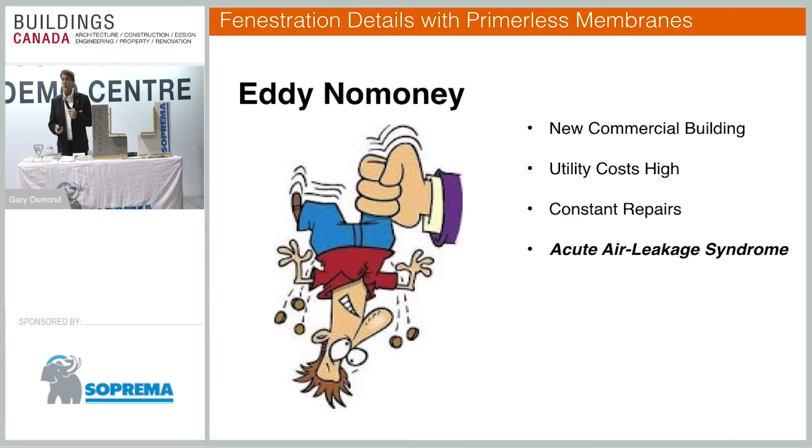The real question becomes - how does this happen?

Look around you. This entire venue is about air barrier technology. We all know the issues - if air can pass through the wall, it's going to create some type of problem one way or the other.

So we clearly know that we have to make critical connections wall to wall, wall to roof, and wall to foundation. But the new frontier is really taking a look at those other critical penetrations as opposed to connections, dealing with window openings, door openings, and different types of penetrations of the exterior facade, be it mechanical or electrical.

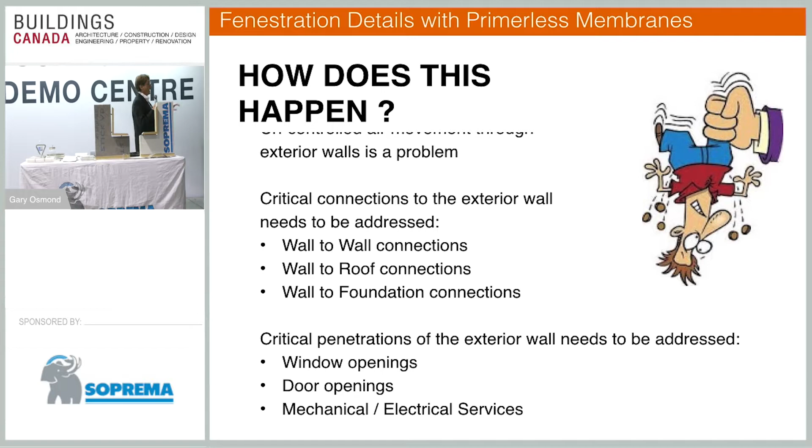The reason this becomes such a critical realm of construction at this point in time is because for the most part, your air barrier contractor is going to be looking after all this. But once we get into these types of details, it's a whole new set of trades coming on, and it's helping and working with these people to understand the consequences and the conflicts of not doing this correctly.

So this is really where I'm going to be focusing a lot of this conversation.

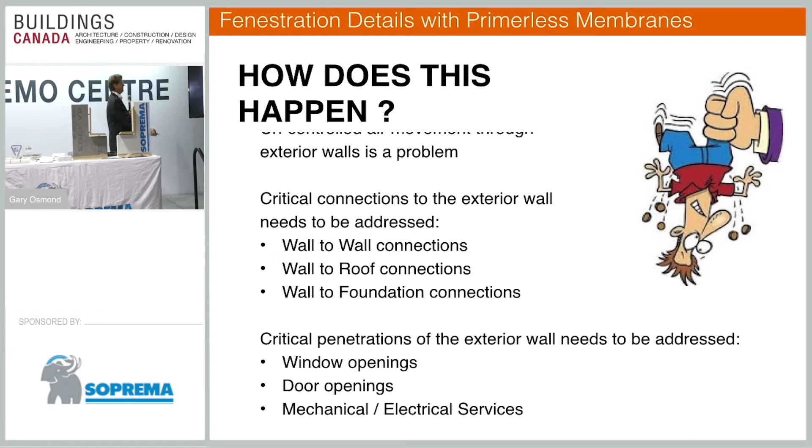You need to be aware there's new standards in the building code. Everybody get to read a building code these days? Somebody put their hands up.

It's more than good practice now. We've been pushing and preaching this sort of terminology and technology for a long time as a good idea, and we have to do it. But it's more than good practice - it's in the building code. You'll find it in Part 5, you'll find it in Part 9, with the National Building Code, the Ontario Building Code, and of course the National Energy Code.

There are sections that specifically look after heat, air, vapor, and precipitation - that's how the code addresses it. And the issue now being said in the code that wasn't said before is it's a matter of design and construction. So that puts you guys a little bit more on the responsibility side when it comes to what is being designed - we have to ensure that it's being properly constructed.

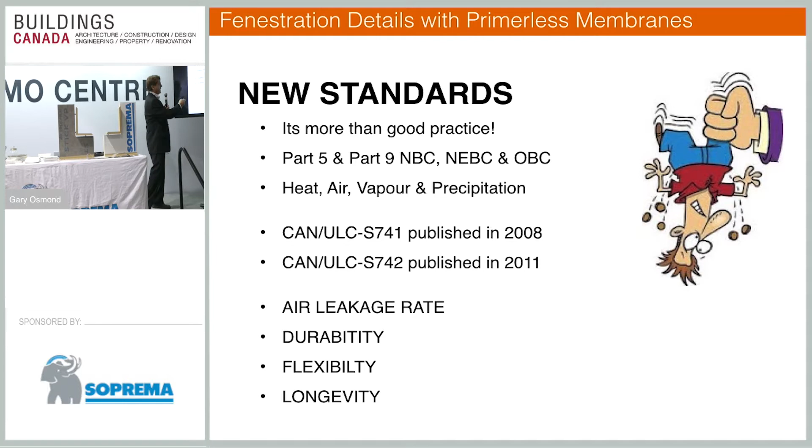There are two standards that you have to be aware of that is in today's code: CAN ULC S741, published in 2008, and CAN ULC S742, published in 2011. They are in the 2012 building code that was released January of 2014. These go beyond some of the other requirements.

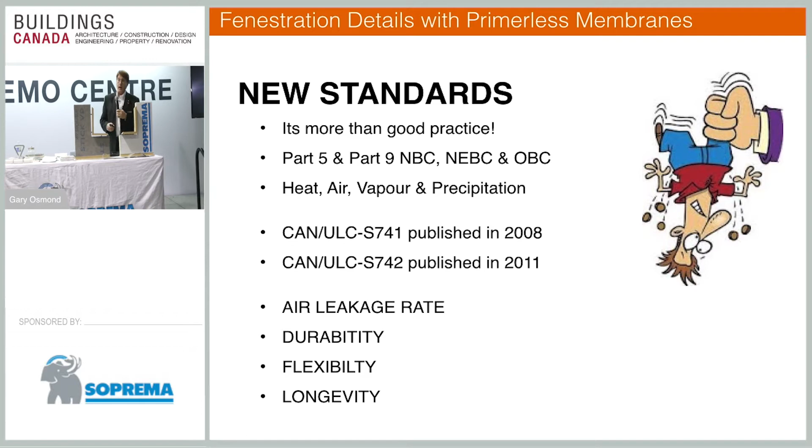Now, unlike a lot of other types of elements within the building, they can't easily be replaced. SOPREMA is synonymous with roofing membrane systems.

Even at that, we expect that in about 35 years you're going to have to do a roof repair, and it's not uncalled for. It's clearly understood. But when we deal with something that's inside the walls, the expectation is going to be there forever, and you're hoping not to go back. Where re-roofing is re-roofing, if you're coming into the wall, it's called restoration, and it has a huge capital projects number attached to it. So looking at those three values, durability, flexibility, and longevity, you need to pick membranes that you're going to be comfortable with, that are going to be there and perform for a very, very long time.

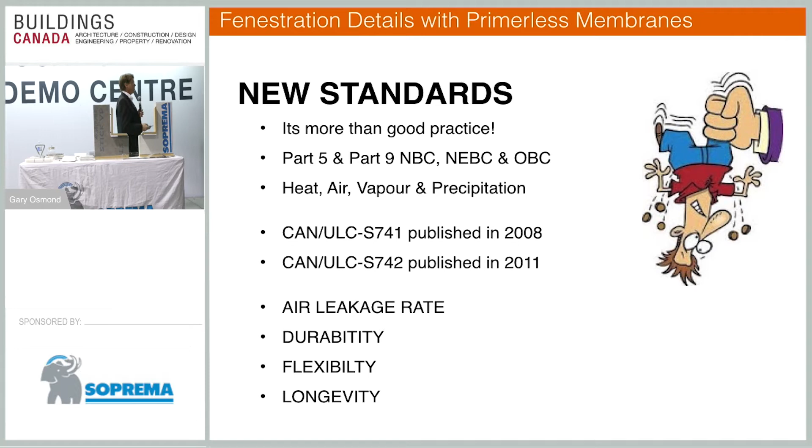So this is where we are now today, taking a look at wall openings. My first comment as we look at this issue of how do we treat the details is to really understand what kind of wall do you have, where is the insulation? I've got three wall models here showing a wall opening with a rudimentary window frame stuck inside of it.

From here it's really understanding, are there any other amounts of insulation on the wall, and how do we do the final connections? So we have to understand, once we got past this part, what's the order of assembly in terms of...

due to poor planning - that's a technical term. Did someone forget to order the windows? And are we putting the cladding on and expecting to put the windows in at the end of the job? Everybody put their hands up who's got small fingers to get in here. Nobody, right? So it's understanding that order of assembly. You can't be installing wall opening materials such as doors and frames after the cladding has been done and after the air barrier is done, because you can't make the connections.

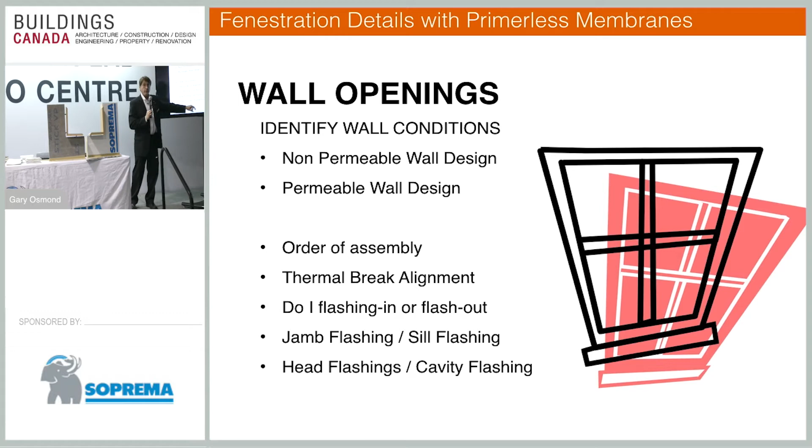It's important to understand the materials we're going to use for jambs are different than the materials you're going to use for sills. It's equally important to understand that the material we use for head flashings is going to be different from cavity wall flashings. Does that make sense to everybody?

So far we're good. As we talk about membranes that are primerless, it makes sense to start with what needs a primer so we can understand the ones that don't. Membranes that need a primer are typically SBS modified bitumen type materials, so they have a carrier sheet, a compound, and then a release paper.

They need a primer on the substrates, and essentially think of primers as solids and liquids. You put the stuff on, the liquid evaporates, and you're left with a goo or a sticky residue, and that's what the material sticks to.

It's important that people understand the use of a roller. You need to use a roller over the membranes because what we have to ensure is positive contact between the membrane and the substrate. Back rubs and little hand jobs, that's not what manufacturers are looking for—you have to use a mechanical device and roll the materials on.

Materials commonly associated with membranes as a primer: Sopraseal Stick 1100T. Vanna White will pass some of these around. So this is an SBS modified membrane, carrier sheet compound on the back. This one is a wall flashing membrane, similar technology, carrier sheet compound on the back with a release paper.

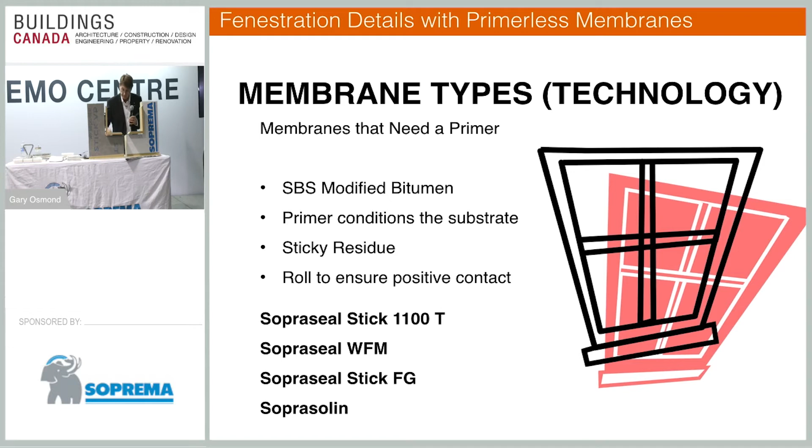So we passed around some membranes—you see the back side has a compound on it. With these materials here, it's a release film followed by a full application of an adhesive to the back side of the membrane. Pull them apart, stick your fingers to them, and you'll find it's a very, very tacky material.

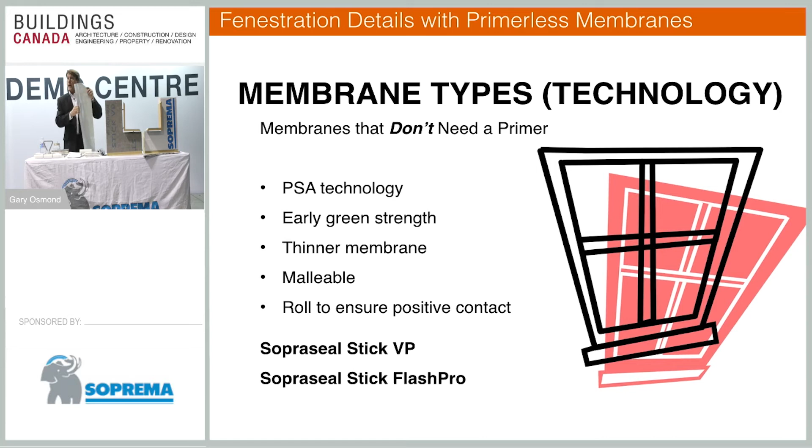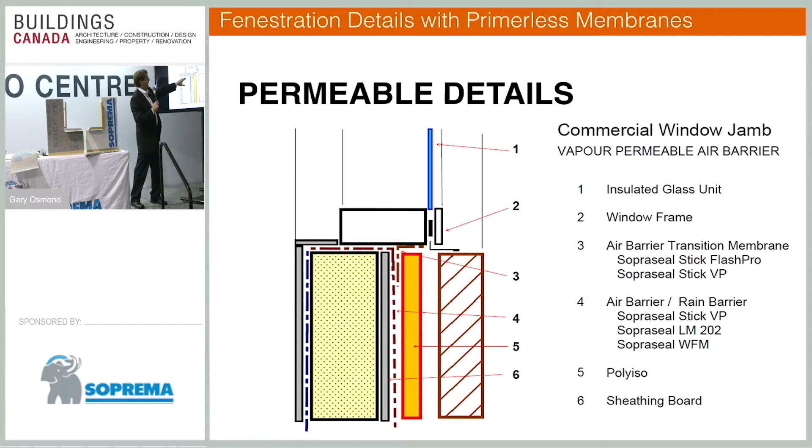So with that, I'm going to whip through a few details and talk about what's happening here versus what we're seeing on the screen. This is a commercial jamb detail where you have insulation inside, and your air barrier is making a positive connection to the vapor retarder—that's the air barrier part. The second part of the air barrier is this little piece here that makes a connection from the air barrier onto the window frame—let's call that a transition membrane. It's part of the air barrier system, but a smaller section of material making that final connection to the window frame.

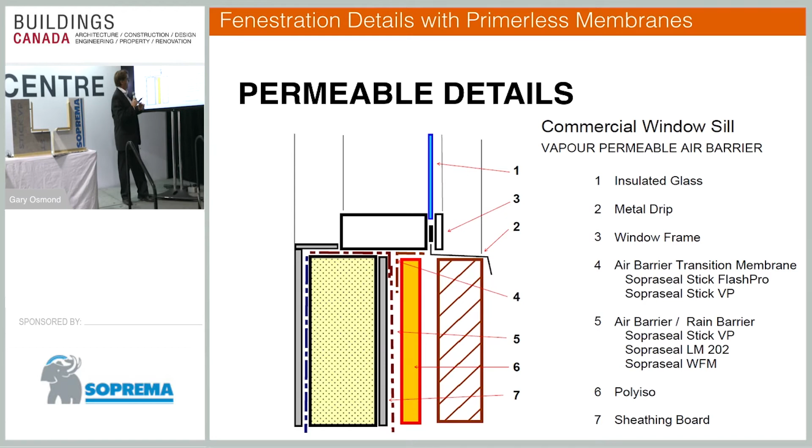Here's my window frame assembly. There's going to be a void between the frame itself and the substrate that you're applying it to. There are tolerances as to what manufacturers will allow you to have in terms of an unsupported dimension here. When you're looking at those types of equations, it's really understanding windows that are static versus dynamic. Is there movement? Is this a curtain wall, or is this a commercial window frame? Is it operable? Is there movement? Is this steel stud construction, or is it wood frame? So all of these are going to play into just how large of a gap you're going to require to ensure the window gets done.

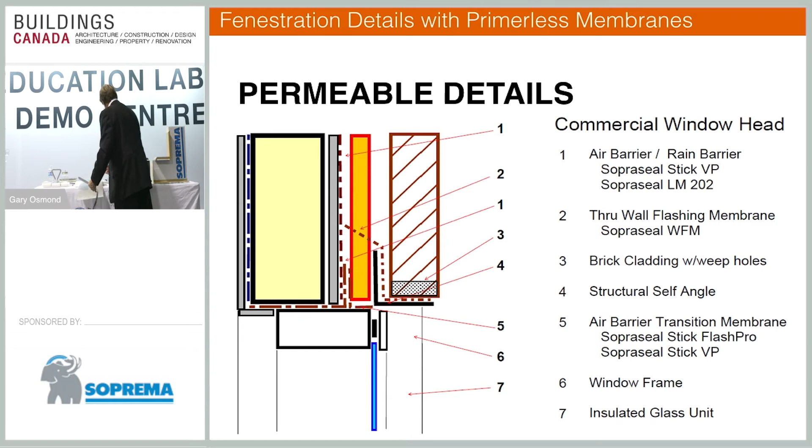And then we have to take a look at—it's escaped, it fell on the floor. Oh, there it is, my backer rod.

Backer rod is certainly something of a suitable nature that one could insert into these locations to give the membrane sufficient support at the back. The effort is, as the membrane is supported, we don't run the risk of another trade coming in and we have a tenting situation and then puncturing it. So we have to give it some support and stability.

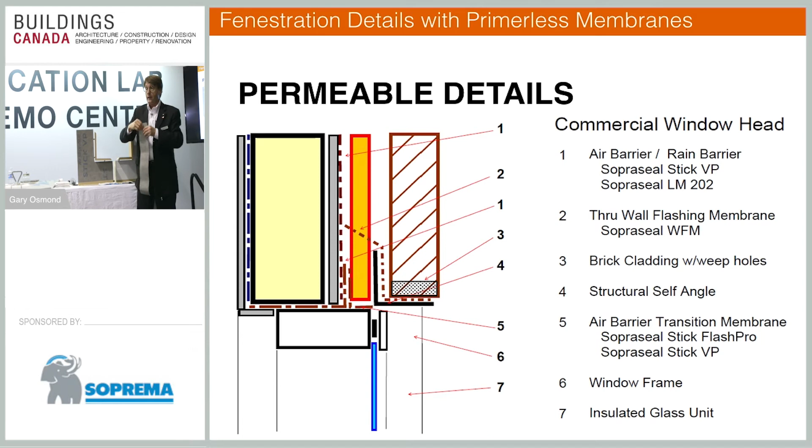The permeable one? So here is a permeable flashing membrane. Due to the size of the models, I haven't done it to its full and proper size, but in essence, you're going to work systematically around the window from the bottom, installing your air barrier to make the connection to the frame and back onto the substrate in a shingle overlapping fashion so that as water is cascading down in behind the wall design, it doesn't meet any butt ends. It will be able to continue to flash over.

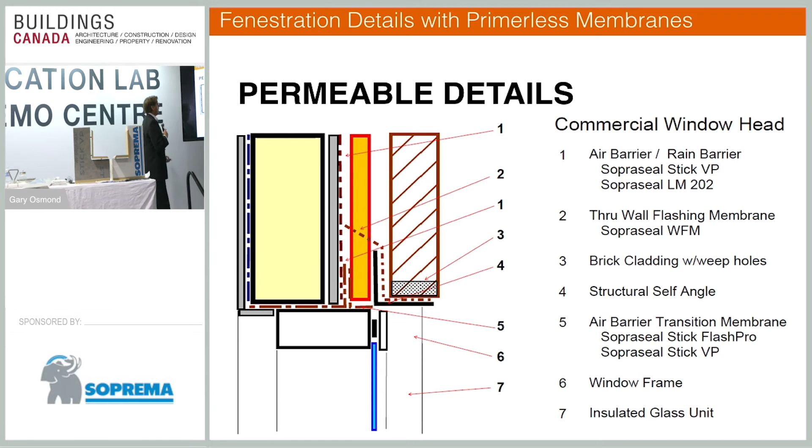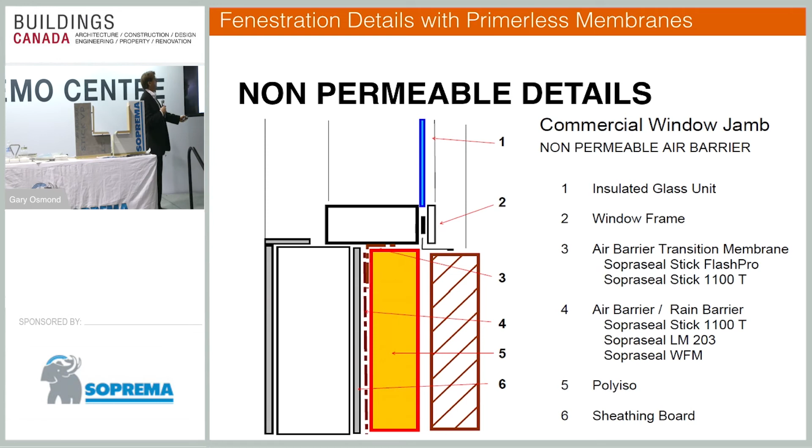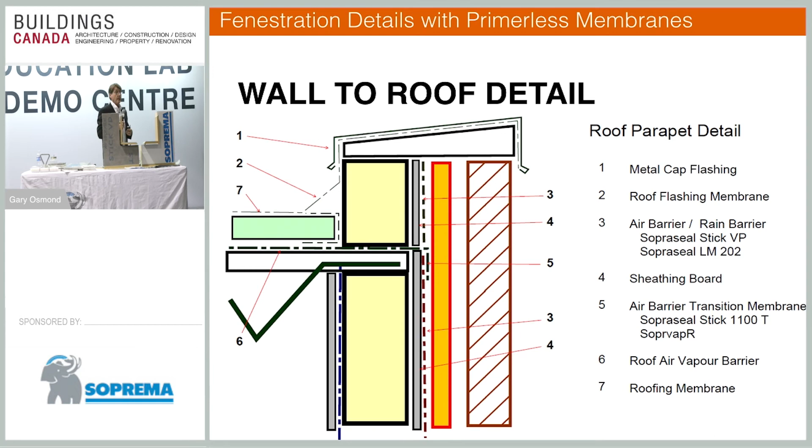Does anybody have any questions about these two models and how membranes are going to get connected? The last part of my presentation is to look at how permeable is permeable. There's a lot of discussion out there about what's enough, what's too little, where does it go. Hopefully we can address this issue with this presentation.

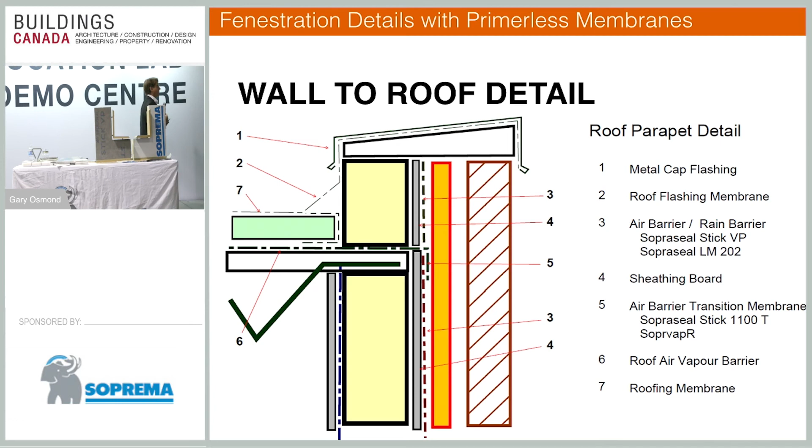We did a lot of looking and studying of the detail to see what the permeability rates or acceptable permeability rates are. What we found is two things: there's a lot of other materials in this wall that influence vapor permeance as much as the air barrier does by itself, and reverse vapor diffusion can be as much of a problem as positive vapor diffusion.

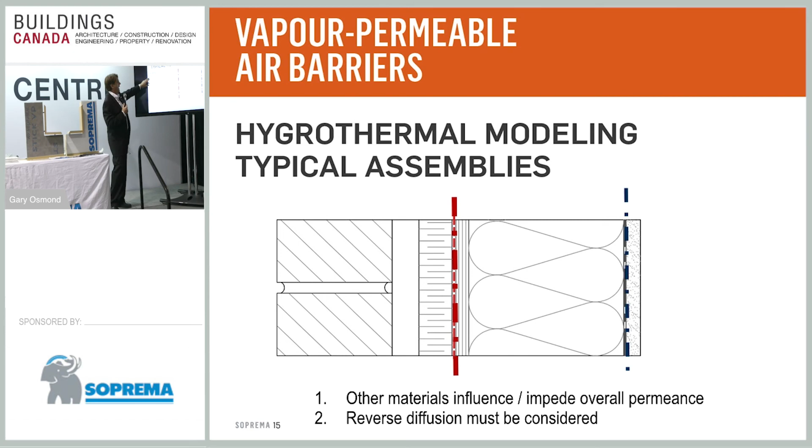So let's talk about that for a second. Outside, it's a month from now, January, minus 15. Inside, nice and warm, 22 degrees. High humidity inside, low humidity outside. So the obvious draw is that vapor is going to go from the inside coming out.

We have a poly vapor retarder here. Could be 15 nanograms, a type 1, could be 45 nanograms, Super 6 for example. But despite all that, by the time you finish putting up poly and drywall and putting all the nail holes through it, you're probably in the area of about 45 nanograms.

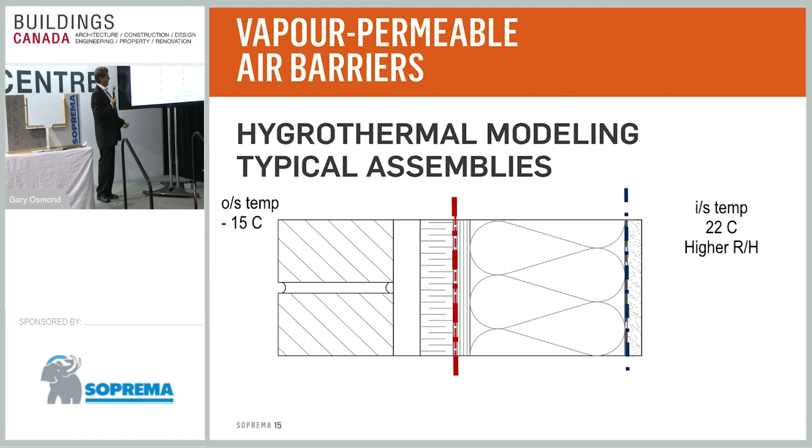Out here, I've got Sopraseal Stick VP at 17 perms, or 972 nanograms. So what we can expect to see is, as vapor diffusion occurs, it's going to come through the poly. Any wild guesses at how much vapor is coming through? About 45 nanograms — that's the limitation.

So that would mean with our product we could see 972, but there is no 972. If it's letting 45 through here, it doesn't miraculously grow into 972 — it stays at about 45. So the amount of vapor pressure coming through here is what you're going to see happening on the outside, and it will be able to pass through the assembly and escape to the outside.

Now we'll switch this around a little bit, because we know there are people with membranes out there in the magnitude of 30 perms, 1700 nanograms. How is this different? Well, if we change the equation to July — it's 30 degrees outside, very high humidity, and we've got the air conditioning on — now my vapor drive goes from here to here.

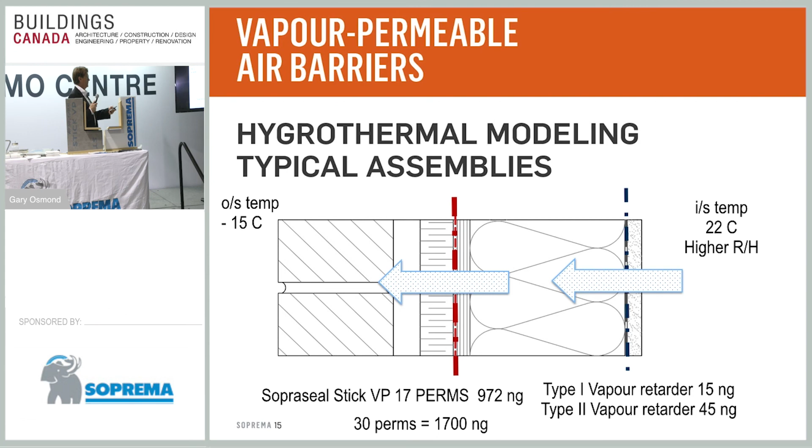If you've got a product with about 1700 nanograms of capacity of vapor moving through the membrane, you've got a lot of moisture coming through, and your barrier is still stuck at 45. So, back to you — we think SOPREMA membranes at about 972, 17 perms, will protect your building in the wintertime when vapor diffusion is happening to the outside, but equally in the summertime where you've got a reverse vapor drive, you're not going to see too much moisture come through and cause condensation at the bottom.

Wrapping this all up, there are membranes that don't need a primer. They bond well, great adhesion, but they have to be installed correctly, on the right type of substrates. There are durability issues and flexibility issues, and this is something you're going to have to consider in your design, since there are some differences between these materials.

SOPRASeal Stick VP was the first one I showed — this is a vapor permeable air barrier. The SOPRASeal Stick Flash Pro was the other material we held up, the one that got circulated. It has a release film on the back, and is a very flexible elastomeric membrane with fantastic adhesion to dry, dust-free substrates.

You get these materials from SOPREMA. We have a full line of compatible air and air vapor barrier membranes, flashing membranes, and liquid accessories to stop this acute air leakage syndrome. We've got to understand how walls go together and help my little friend Fast Eddie here get a return on investment by properly sealing these things up.